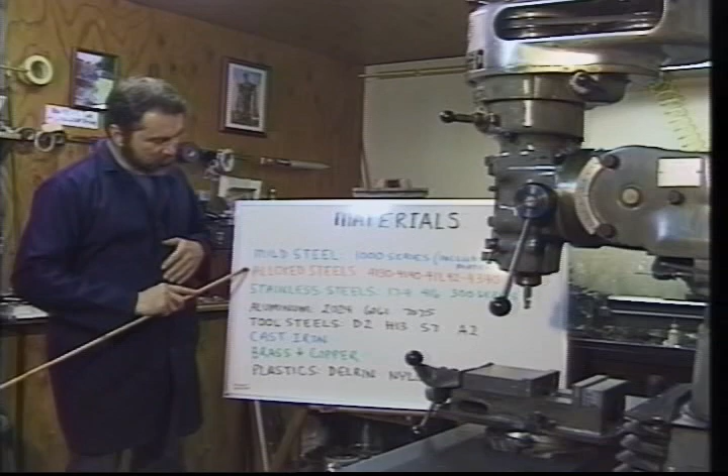Mild steels, alloyed steels, stainless steels, aluminums, tool steels, cast irons, brass and copper, plastics such as Delrin and nylon. In the mild steel category for building parts, washers, bushings, different things of this nature, the 1000 series of material works really well. There's also some good leaded materials like 11L17 that machine really well.

You get excellent cutter life, you've got high feed rates, you can really process a lot of parts in these materials. It's a non-critical material, it's not something that we would be heat treating. It's just spacer blocks, tooling fixtures, things of that nature can be made out of mild steels.

Next, let's take a look at alloyed steels. These are usually our higher chromium-based steels, such as 4130, 4140, 41L42. The L designates some lead in the material, so it machines a lot better, and 4340. These are probably some of the most popular types of alloyed steels that you're going to be working with in the machine trades. They machine reasonably well.

They heat treat up to 45, 48 Rockwell, depending upon the one that you choose, and are very popular for race car parts, parts that have a high stress application where we need a good high tensile strength and surface hardness. Many of you may be wondering, well, what type of cutters do I need to be using when machining these types of materials? For all of our mild steels, high-speed, cobalt, and carbide will work just fine.

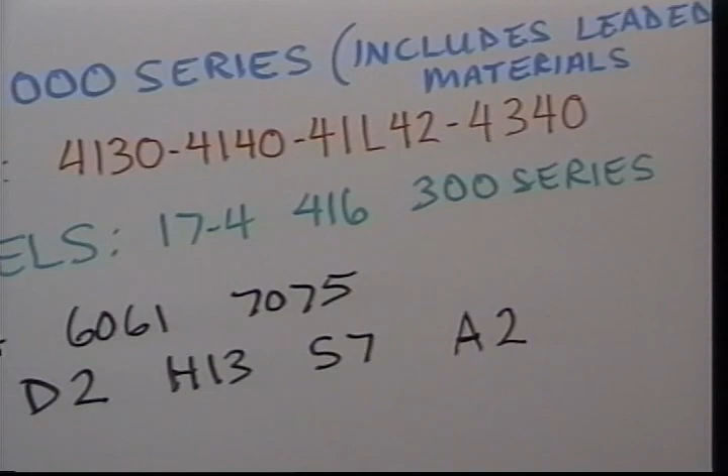When we start machining stainless steels, 17-4, 416, and the 300 series stainlesses are by far the most popular. 17-4 is probably the best in terms of corrosion resistance. A lot of people whine and complain about machining 17-4. My experience has been if you use proper fluids and good sharp cutting tools that it machines just fine, especially in the annealed or normalized condition.

416 is usually a free machining type stainless. It's used a lot in the barrel industry. It has a reasonable amount of sulfur in it, so it does machine well. The 300 series of stainlesses, 303, 308, are also good materials. They will work harden. You want to watch on the 300 series. Keep the cutter moving across them. Use a good cutting fluid in that process.

Anytime that we use a 17-4, which is a precipitation hardening stainless steel, anytime its Rockwell exceeds 40, again, carbide is probably the best choice. You can do it with cobalt, but you're going to get some squeaking noises. You're going to need to apply a lot of fluids anytime the Rockwell gets around 40 in that specific material.

Next, let's take a look at aluminum. The majority of our tooling fixtures are going to be built out of aluminum. 2024 is an excellent tooling plate material. You'll have a hardness designation of T351 on it. Anytime in aluminum, we're going to be dealing with 4 specific numbers. That is the alloy of aluminum that we are using. The last number, T351, T6, T751, those are the hardnesses of those specific alloys.

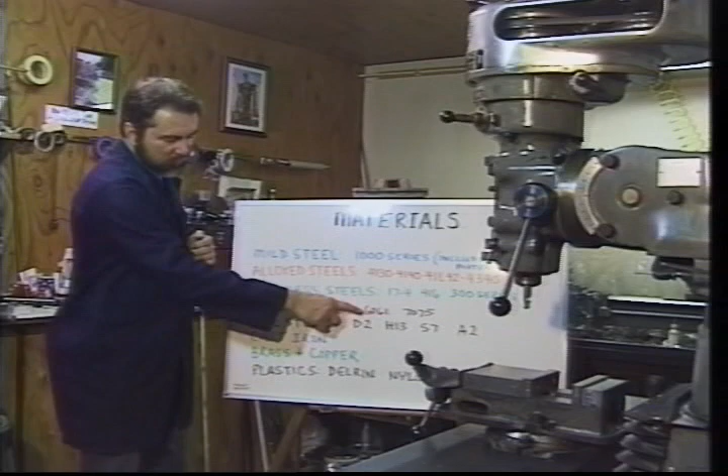6061 is an excellent material. It has a tendency to be a little gummy by comparison. I really prefer 7075 in a T6 hardness. It machines really well. It anodizes very well. That is my preferred material if I'm building tooling, jigs, and fixtures.

Let's take a look at tool steels. If you're lucky enough to get a job in the mold making industry, you're going to be dealing with a lot of tool steels. D2, H13, S7, and A2. D2 is probably one of the toughest type materials that you're going to machine. You're going to use carbide or cobalt cutters in most applications there. It's a very abrasion resistant material.

S7 has good machining characteristics, very tough, durable material. If you're going to be building a part that's under a tremendous amount of stress or taking impacts, S7 is an excellent choice.

Cast iron, we talked about that in our lathe series for those of you that watch that. Cast iron, we want to be really careful when we're clamping it on the table, not to put it under any stress where it's going to crack. We do not use any cutting fluids at all in cast iron. Carbide makes an excellent cutter choice when we're machining cast iron.

Brass and copper, those are a couple you need to watch out for. They machine well. Copper, on the other hand, though, is a very sticky, grabby substance to machine, and you do not want to get too aggressive in the feed rate when we're machining copper. It has a tendency to want to suck the cutter into itself, especially under climb cutting conditions. So take your time, be careful with the copper.

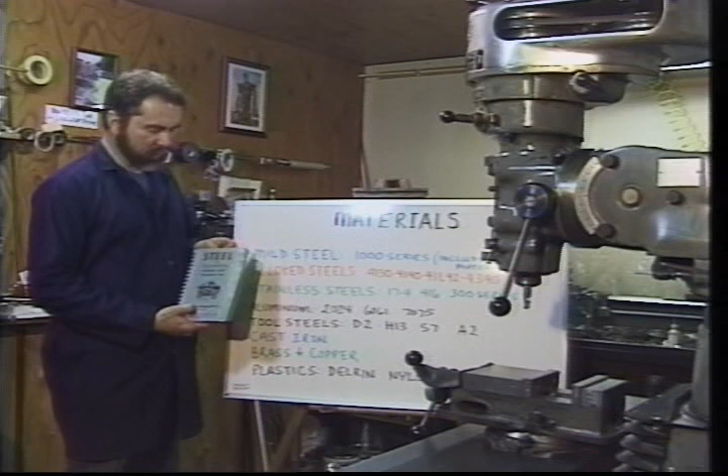Remember, we talked about 2024 aluminum. It's going to give us the color markings on the rod and bar. The ends are usually painted red. This is one of the best known of the high-strength aluminum alloys. With its high strength and excellent fatigue resistance, it is used to advantage in structures and parts where a good strength-to-weight ratio is desired.

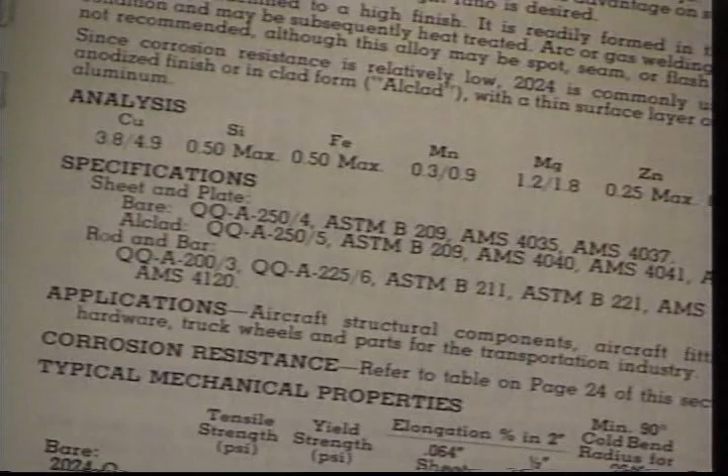That's just part of the information that's available on 2024. Let's look at some additional information. We have specific applications, primarily used in the aircraft industry for structural components, tooling, truck wheels, etc. It also will tell us the machinability of this specific alloy in its different heat treatments. It'll also show the heat treatment of the material. Remember the T designations after the 4 numbers of the alloy, T3, 4, 361, etc.

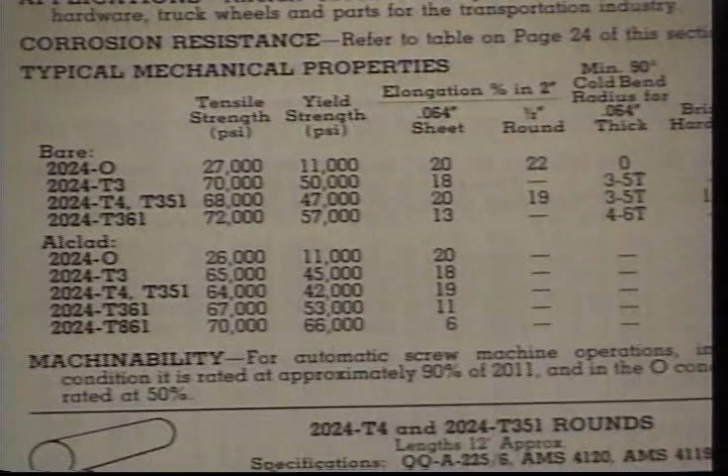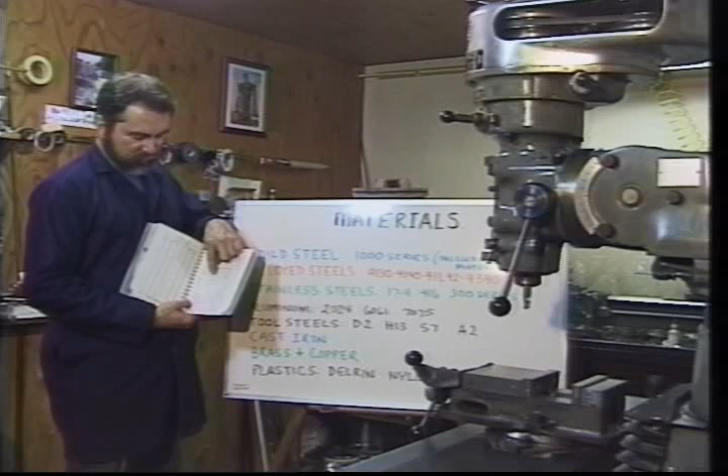Look at the tremendous difference from the standard mill run or annealed condition with a tensile strength of 27,000 psi and a yield strength of 11. Now in a heat-treated condition of, let's say, T361, that same tensile strength goes to 72,000 psi and the yield to 57,000. So approximately 3 to 5 times the strength when we heat treat that alloy. You can see how valuable of a reference source these types of books can be.

Now let's take a look in the Machinery's Handbook at a different type of alloy. Like the Jorgensen catalog, the Machinery's Handbook is an excellent source for information. One of the things I like best, we can look under specific steels and applications, and they make a recommendation as to the type of steel. Let's take a look at forgings that are heat treated. 6150 is the suggested material.

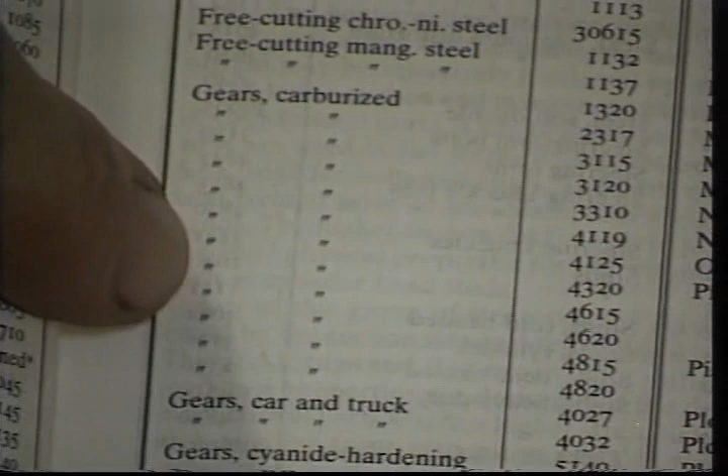If we're going to be doing gears that are carburized, 3120, 4125, 4320 are, again, excellent choices. Moving down to the bottom of the page, we can see gears, gear rings, gear transmissions, an excellent reference source if you have a specific application that we're trying to match. Simply consult the machinery handbook, look up the designated material, get on the hot phone, call up the local steel supply, and order a truckload for your next machining job.

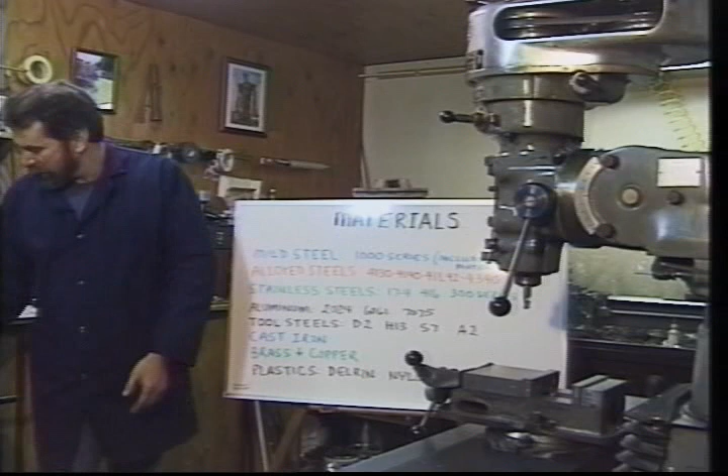There is a wealth of information in the machinery handbook. Take the time to read it and become familiar with it. It will answer a tremendous amount of questions that you may have on alloys, machining operations, etc. Keep in mind that different types of alloys are going to be color-coded on the end of the bar. Consult your local vendor from whom you are purchasing, and he'll be glad to give you the color code reference charts.

Another thing I like to do is go to the local steel suppliers in the area. Usually they're going to have a remnant pile that's filled with cut-off ends anywhere from 6 inches to 2 foot long. You can also buy aluminum plate and steel from these same vendors. It's a good idea to pick up a truckload of this next time you're in town because it's an invaluable source and it saves and makes you a lot of money in the long run.

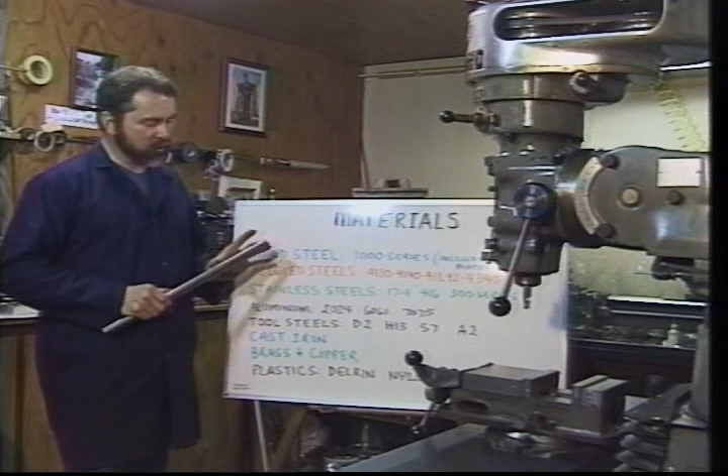If a customer comes in and he needs you to machine a part 6-8 inches long, you're going to have to call up and buy a 20-foot bar from the local vendor. Again, this is money out of our pocket. If we want to use materials for a piece of tooling plate or a little jig and fixture, having our little bone pile in the corner can be an invaluable resource. Keep those things in mind the next time you're at your tool steel supply house.

I don't know about you, but I'm getting a little antsy to start making some chips. We've covered a lot of the basics, different machine operations, the types of materials used. Now let's show you the proper way to prepare that piece of stock for a project.

We've got a piece of tooling plate that we cut 1.25 inches thick by 2 3/4 by a little over 4 inches. You can see when we cut it off in the saw, we've got a rather large burr here. And this is part of the stock prepping procedure. We simply wouldn't cut it off, set this material in the vise, and go to work on it. We're going to take a file, 6/8 inch single cut file, works really well, and we'll go around all of the edges of that material.

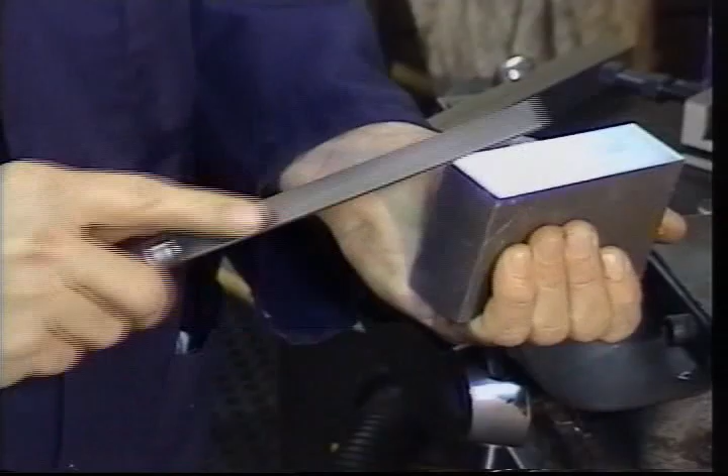Remember to push the file at approximately 45 degrees to the part. The file cuts on the forward stroke. We're going to go through and basically deburr this entire block, so when we set it in the mill vise, we don't have any burrs, nicks, or dinks affecting the parallelism of the part. You can see we've got a big dink here, so we're going to use that as our first cut to machine that away on the top.

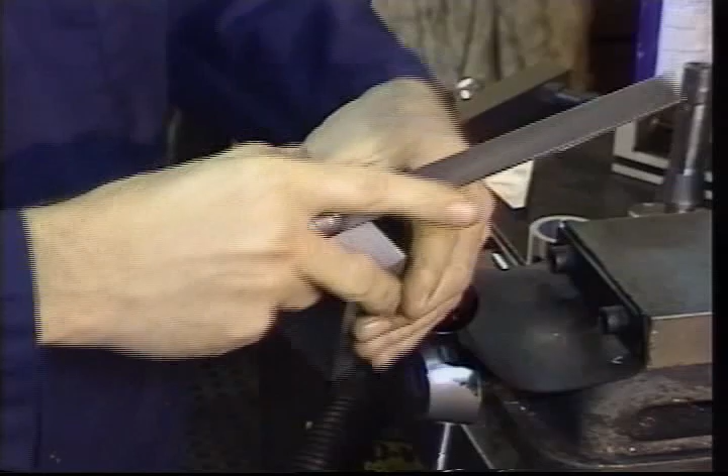Take your time during the stock prep. It's very important when we get ready to square and true up the block that we've done this. Each time that we make a cut on the part, we want to check it for a burr. We don't want to be switching back and forth and forget that we've got a big burr on one side that will later affect the accuracy or trueness of the part that we have.

Take your little paper towel, wipe the filings off of the block, and then I get in the habit of just running my hand over the block from time to time, making sure that I haven't missed anything, okay? We can take our file and run it over that surface, make sure it's flat. Usually the milled slabs that you see from the manufacturer are going to be pretty true, so we can use those as a baseline. Run our file over them, nice and smooth, remove any filings that we have left on the part.

All right, so we've prepped this piece of stock. We're now ready to set it in the mill vise and make our first cuts in order to get it truly square and parallel. We want to wipe our vise jaw nice and clean. Again, we don't want to be setting it on any parts or chips that will cause it to not work off of the vise jaw.

The rear jaw I like to refer to as the master jaw. We've dial indicated in, if you remember earlier when we mounted the vise, these particular vises are ground true and parallel within a couple of ten-thousandths of an inch. So they're very, very precise. We're going to set this block against the face of our vise. Now, if the block is not parallel or tapered, when we clamp it, it can be shifting in the vise one way or another, and you go, wow, that's a real problem. How do we overcome that?

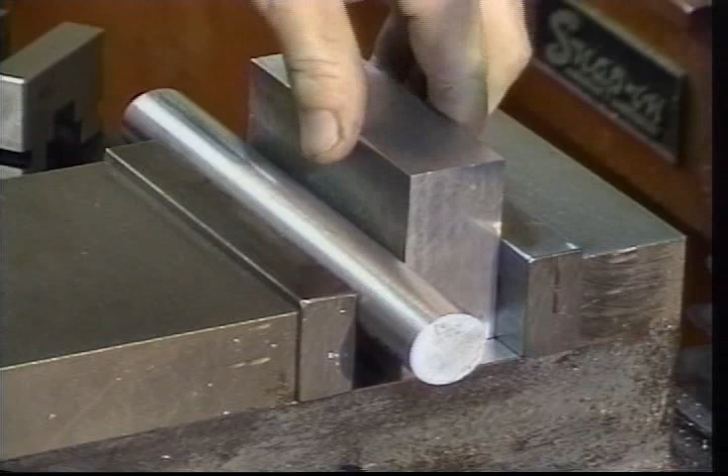A neat little trick that's often overlooked by many folks these days is simply take a piece of round stock, put it in behind our block, where we're just pushing on the center of the vise jaw, and tighten it down, okay? We've ensured that this face is clamped securely against the face of the vise, and now we're going to go ahead and take a pass across the top of the block.

We can do that with an end mill. We can do it with a fly cutter. Let's start with an end mill, and I'll show you a little trick to significantly reduce the amount of burr that we get on the part by cutting this in a climb cutting method across the top. You've watched a couple of times.

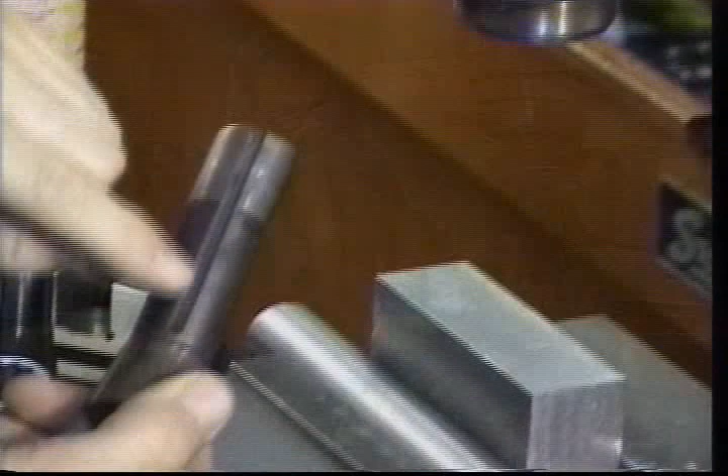We'll go over the final details of securing the collet in the chuck. You're going to have a little nubbin in the chuck that tracks off of the R8 collet. It's a little guide that's in the spindle that matches this slot to keep our R8 collet from spinning in the spindle as we tighten it up. So we'll simply insert it, rotate it around until it lines up, push it in place.

We're going to reach to the top of the mill head, and we're going to finger tighten the drawbar to suck the collet into place. Once we feel the draw nut come up tight, we're going to insert our end mill, choke it up nice and tight, reach up with our wrench, and we've noticed the brake on the top of the mill. Okay, we're going to put the brake on as we tighten the drawbar. Get it pretty snug. We don't want to twist it off. We don't want to damage the collet.

We're going to bring our cutter down in contact with the work. Remember to keep the quill handle in the proper relationship. We don't want to be pushing forward with the quill handle. All right, and I like to start on one end of the part, so we're going to move the table in what axis? All right, the x-axis. We'll center up our cutter, bring it down until we just come in contact with it. We're going to lock our quill. We can go ahead and set our stop.

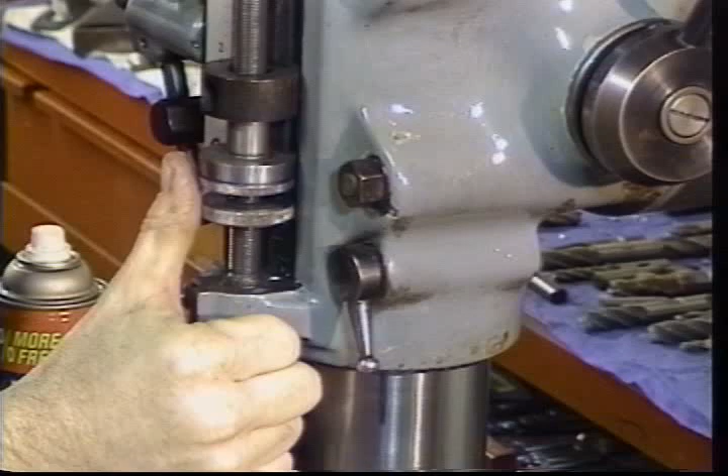Quill stop, run it up. You can see how I'm using my thumb. I've got about 1/4 of an inch spacing between the stop dial and the actual lock nut. And as I run my thumb across them, we're turning them up at both about the same level. So we're not playing chase. One locks into the other. Okay, we're ready to go. On this particular cutter, we're going to turn it at 1115 RPM.

We'll advance it and just scuff the top of the workpiece. We know we're in contact with that. We're going to raise the bed of the mill 20 thousandths. We're going to take a 20 thousandths cut the first time. Rather than go down the center of the part, we're going to index over to the left, and we're going to cut around the periphery of the part, removing the burr from the outside edge. So we'll index our cutter over, give ourselves a shot of WD-40 across the top, and advance the cutter where we're just cleaning up the top edge, cutting into the top of the part, forcing the burr off of the part.

In a production process, if we're doing a lot of these blocks, this will save us a tremendous amount of time in cleanup and burring. Okay, you can see that our block was out of parallel a little bit. We didn't clean up on that side. So let's go around to the other end. Okay. You're getting a little bit of an optical illusion with the cutter on camera. Don't worry about it. Just watch the direction of travel of the cutter. We'll go back and let's take another 20 thousandths off.

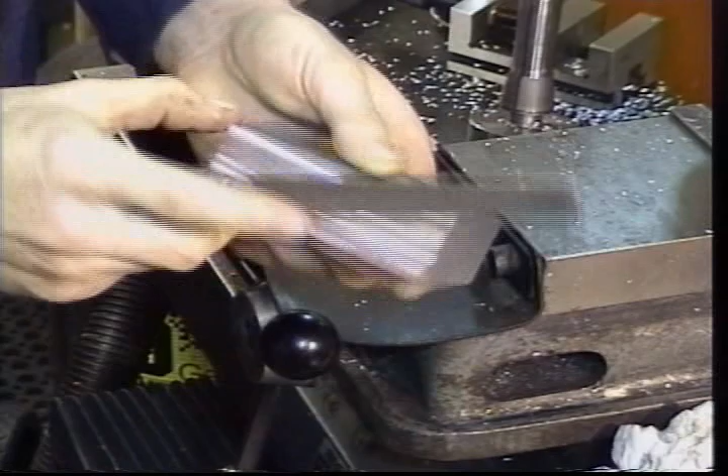So with this part surfaced on this side, simply remove our bar, take the part out of our vise, and as a matter of habit, we're going to go ahead and take our file and, just for practice, put a little chamfer on that outside sharp edge.

Okay, usually 3 or 4 passes of the file. We'll try and give you a close-up view of that so you can see the width. You can see we're just breaking that razor sharp edge with the file. Make sure and wipe the part off again because we've got little chips and stuff from our milling operation. Be sure and clean the vise out.

If you don't have stock in a paper towel company, I strongly suggest you do it, that or the rag company, because you're going to be using a lot of rags, keeping the vise clean, keeping all of the chips out. Once I've done that, I like to take my thumb and just run it across the vise jaws, making sure that there's no residual chips left.

All right, we're going to take our machined surface that we just machined. That's going to go into the bottom of the vise. This was the face or surface that we had against our master jaw. So we're going to want to repeat that as we insert our part back into the vise. Push it up against the master jaw. Grab our piece of round stock. Hold it down. Okay, and tighten our vise up.

We don't want to scrounge down on the vise. The vise exerts tremendous holding force. Simply snug it up pretty good. And we're going to go ahead and resurface this top edge. What is that going to do for us? You guessed it. It's going to make those two surfaces parallel and to dimension. So we'll go ahead and take another pass across that. Then we're ready to square the ends of the block.

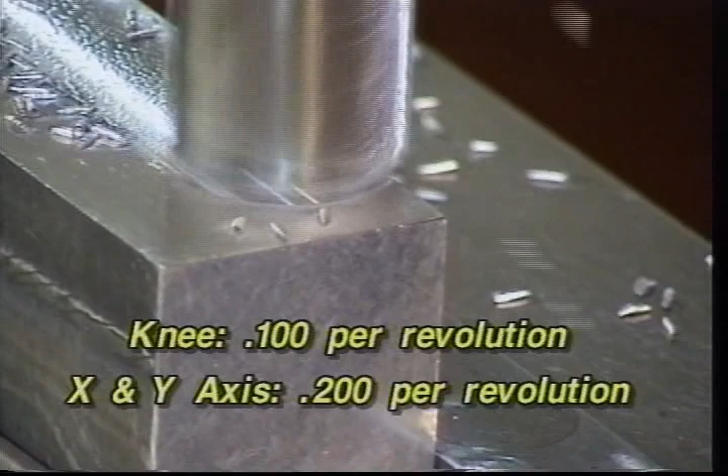Remember, on the knee, our dial is in 100 thousandths per revolution. On the cross feed, on the X and Y axes, our dials are in 200 thousandths per revolution. Index our cutter over, down the top of the part. It's a very light machining operation. Again, we're taking only 20 thousandths off and surfacing the block and bringing it into a desired dimension.

Take our towel and again wipe our part off, getting a lot of the chips and stuff out of the way. Okay, we have our back reference pushed against our master block. We've created this surface and the bottom surface parallel and to dimension. Now we're ready to square the ends of the block.

If we're to run our dial calipers, check that into the block. We've got 2 inches, 620 thousandths on this side. 2 inches, 620 thousandths on the other side, okay? Always get in the habit, again, of checking our part. If we were to get a chip inadvertently in the vise underneath the part, it would cock it, and those two ends would not be parallel.

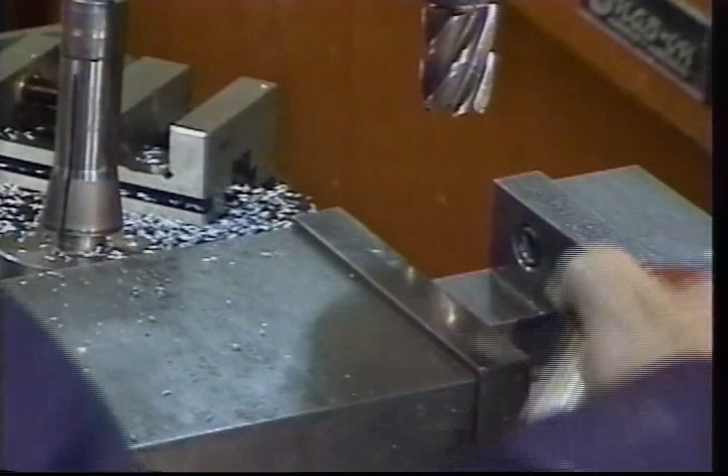Okay, with our vise jaw clean, it's now time to insert a couple of precision ground parallels, and I'm going to show you another trick that I've learned over the years, and that is to keep the parallels in place. Simply give your vise a little shot of WD-40 or any other type of spray oil, and this allows the parallels to, in essence, stick to the jaw at that point, okay? They kind of bond themselves there with that oil. We can tug on them a little bit, and we can't break that bond.

Make sure that your parallels are nice and clean and they're free from any nicks or dinks in them that may affect the accuracy or parallelism of the part that we are setting on top of them. I like running them back and forth once I mount them, and this allows you to feel any clinkers that may be underneath the parallel. Okay, so just get into that habit again. It's stuck to the vise jaw with the WD-40.

Go ahead and open our jaws a little bit. You can see now that we have a depth of approximately a ½ inch here. The depths of these jaws are 1.5 inches. So we've got a ½ inch of our master jaw to set it against. We're going to go ahead and set our block in.

In this fashion, we can retract our parallels a little bit because we're going to go ahead and square this surface now. We dialed in the back surface of our master jaw, so when we work off of the y-axis, what is going to occur? This surface and this surface are going to be exactly 90 degrees or perpendicular to one another. This is how a mill works. A mill makes things square and perpendicular to one another, just like the lathe turns things in a round, cylindrical fashion, faces them off square, etc.

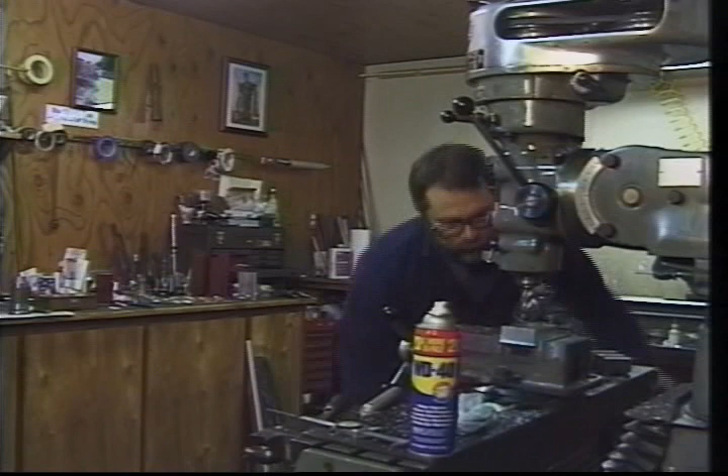Okay, we'll take our cutter. We're going to raise the bed up a little bit so we don't have to extend the quill down nearly as far. Move the table in the x-axis to get the cutter over on the side. Okay, we can go ahead and lower the quill at this point. Run the cutter up on the side. Make sure that the cutter protrudes below the thickness of the part.

We've got a little bit of a radius ground on the edge of the cutter, so again, you want to make sure that that radius extends below the part so we get a real nice flat surface. We don't want a little bit of a radius being machined on the bottom of our part, which will overall affect the squareness of things. Once this is in position, go ahead and lock down the quill, and we'll turn the cutter by hand now.

If we're cutting, you can see the cutter rotating this way. If we're to move the cutter this direction, that is in a climb cutting mode. And anytime we take climb cuts, we want to have a very small amount of chip load in the cutter at that time, because as we advance the workpiece into the cutter, it's trying to walk its way along or climb its way along the top of the part that we're machining, and this can be rough on the machine. If we're to take a real heavy cut and try climb cutting across that with a real fast feed, we can literally shear off or break that cutter as it becomes really aggressive trying to grab more material.

If we were to turn this direction and pull the cutter this way, this is called conventional milling. We're scooping the work out. The work is resisting the thrust of the cutter as it's being fed manually by the table across the part. We can go both directions to remove a maximum amount of stock, but the heaviest amount of removal occurs when we are in the conventional cutting mode. Okay, watch, we'll show you both methods.

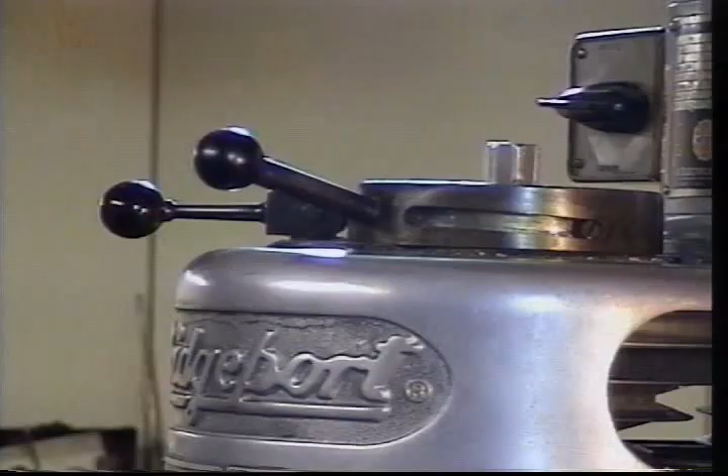We've showed you how to install the cutter. Now, here's a couple of tips and tricks on how to remove the cutter and replace it with a fly cutter. We're going to reach to the top of the mill and apply the foot or hand brake. Put our wrench on top of the drawbar. With the brake on, we're going to go ahead and break the cutter loose. Once we see the wrench is starting to turn freely, we can loosen our grip on the hand brake. We're going to reach down and with our index finger and thumb, grab the cutter as we continue to loosen the drawbar.

Once the drawbar is loose, I like to take the wrench, or you can take a plastic hammer and simply tap the top of the drawbar, and that breaks loose the collet from the cutter, separating the two for removal. Take your right hand, take your middle finger, put it on the collet with the left hand at the top, and we're simply going to spin the drawbar off, releasing the collet from the spindle.

Okay, very important. Don't drop the collets. Don't drop the cutters on the workpiece. If you're dealing with a carbide cutter and you drop it out of the collet on the workpiece, there went a $40, $50, $60 cutter because it's going to chip and break. Make sure that we've removed all chips from the R8 collet when we get ready to install the other one.

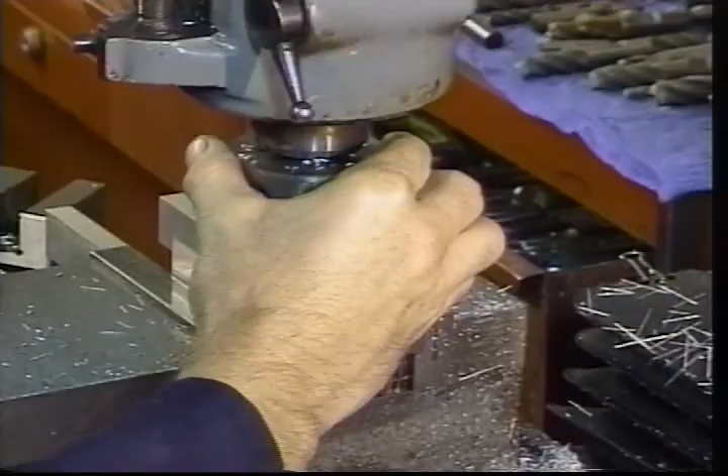Insert it, rotate it until we find the guide, reach up, engage the collet with the drawbar by turning in a clockwise fashion, and we're now ready to install our fly cutter. Choke the fly cutter up nice and tight. We want to have good rigidity in any cutting operation that we engage in. You can see we've got about 3.5 inches of depth between the fly cutter and our surface part.

We can go ahead and raise the knee, again keeping a very rigid setup while we're machining this. You can also bring the quill down if you want. I like maybe bringing the quill down an inch, inch and a half. We're going to bring the cutter down towards our workpiece with the quill and watch until the cutter just comes in contact with the top of the workpiece, okay? At that point, we're going to reach over and lock the quill down.

We're going to go back to the knee and our Z-axis, and in a counterclockwise motion, we are going to lower the table 5 thousandths. So now if we advance, the cutter is not scuffing on the top of our part, okay? We'll do this once the cutter is running and we're ready to advance it into the workpiece.

Remember, a fly cutter is not for rapid removal of a lot of material. It's simply to surface the material. A heavy cut with a fly cutter is usually 50, 60, 80 thousandths, not much more than that, depending upon the type of material that we're doing. Very fine amounts of material can be removed in order to surface the top of the block.

So we're going to go ahead and back the cutter away from our block. Okay, we've got clearance now, so when we turn it on, we're not ready to cut. We're going to go ahead and advance the cutter over the top and very gradually raise the table to the 5 thousandths that we did when we lowered it. Okay, so now we're in contact with the block.

Oftentimes we're called upon to perform a second or third machining operation on an existing part. So it's very important that we understand how to properly set that part up, make different locations based on that part's length, diameter, width, etc., so we can get a hole in the right place, machine a slot in the right place. As an example, we're going to take this round cylindrical piece of aluminum tubing. The customer has requested that we find the center of it, drill a hole in the center of the part in this dimension as well as this diameter.

Now, a problem comes to mind. Many of you will say, all right, well, we'll just set it in the vise this way and clamp it. Well, two things can arise in this particular application. One, if we tighten the vise too tight, we can simply crush this piece of tubing. But most importantly, we don't have any place to get at to really measure. We could come back off of our master jaw with our edge finder and kiss it this way and then move into the center. But I think a better way to hold this particular part is to simply turn it in the vise this way.

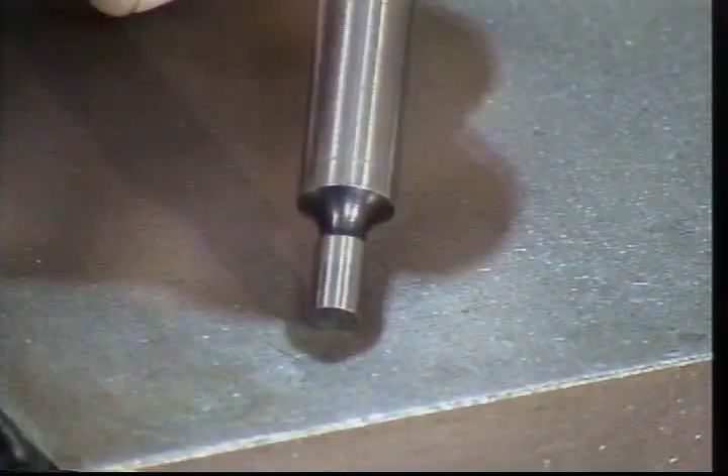All right, this allows us to measure off of an exposed area here as well as on this side. So we've got two uninterrupted areas that we can bring our edge finder against in order to locate the edge and thereby the center of the part for our drilling operation. This particular tool that I'm holding in my hand is called an edge finder. Very important tool for the machinist.

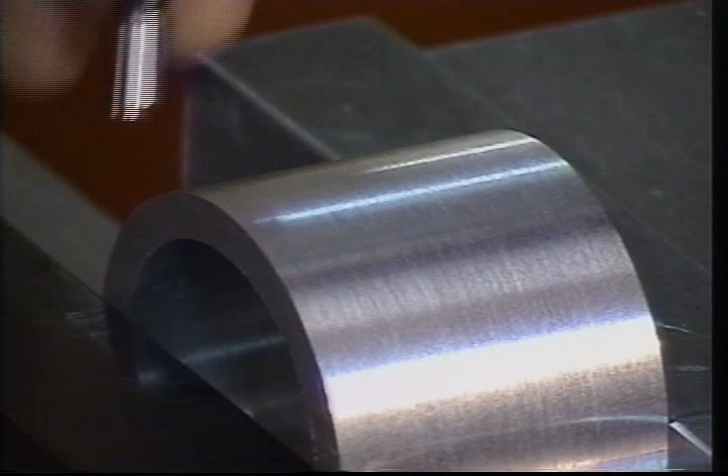These little nubbins that you see on the end are held together in the body by a long extension spring. So as we run it up against the part, it starts running true, and then the moment that we hit the part, you're going to see it jump in an offset mode this way, indicating contact. All right, the diameter of our edge finder is 200 thousandths. This is usually a standard. So anytime that you're dealing with an edge finder, run your dial calipers or micrometer over the end to determine the diameter of it. As we bring our edge finder up to the part and it makes contact, you'll see the offset kick in. Okay?

At that point, we've made contact, and we can go ahead and adjust our dial, whether we're using a digital readout or, in this instance, we're going to go ahead and use the X and Y axis and loosen the dials on the bed in order to perform this operation. So if our part were 2 inches thick, the center of it would be 1 inch plus the 100 thousandths offset that we have in the edge finder. So we would move the part over 1 inch and 100 thousandths from our contact point to locate that hole exactly in the center. It'll become a lot easier for you to understand once we show you the actual process.

We're going to grasp this in the Albrecht keyless chuck. The body diameter is also 3/8 of an inch in diameter, so we can grab it in a collet. But a drill chuck is the obvious holding method because we're going to follow it up with the center drill.

Let's take the dimensions on our part and start to calculate where our center line is going to be. Using the dial calipers, we've got a dimension of 1 inch, 250 thousandths. So half of that is 625 thousandths plus the 100 thousandths for half the diameter of the edge finder. So from either edge, the amount that we would move the table in the y-axis is 725 thousandths. We'll work one dimension at a time. Watch closely as we show you the offset when using an edge finder.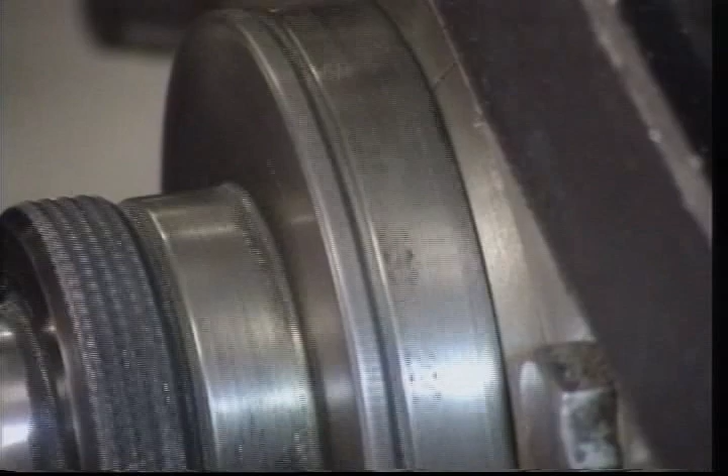We'll slowly go back to our dial now, and we're going to advance the table 725 thousandths. Remember, in the X and Y axis, each rotation of the dial is 200 thousandths per revolution. So we've got 200 thousandths, 400 thousandths. Watch our knob. This is a good counter that we can do each time we rotate it. 600 thousandths, 700, 5, 10, 15, 20, and 25, stopping on 75. Now it's time to lock the gib down on the y-axis of the machine. We'll turn our machine off.

We'll take another dimension as to the diameter of the part. 1 inch, 740 thousandths. We're going to divide that by 2, so that is 870 thousandths plus the 100 thousandths for the edge finder. We're going to advance our table on the x-axis, bring our edge finder down to where it just goes past the center line of the part. Remember, we always have to work off of a diameter or an edge of a part with the edge finder. Now it's real critical that we don't get the body of the edge finder up against the part, because this is going to give us a false reading. We simply want our 200 thousandths diameter lug to be the indicator. So be very careful in the placement of that.

Lock our quill down, turn our machine on, and again, watch for the offset as we come in contact. All right, we can see the offset appear right on the edge here where my fingernail is. We're running flush, there we see the offset. At that point, as soon as we see the offset, we know that we've made contact. We're going to reach under the table, lock our gib down, locking the table into the x-axis. We're going to loosen the lock ring, rotate our dial to 0, lock the lock ring down again, loosen our gib.

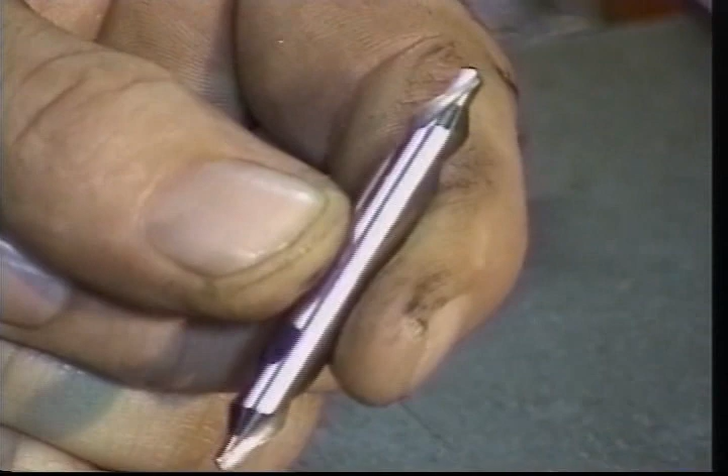Remove our edge finder, install our center drill, and let's take a minute and talk about center drills in the milling operation. We have different sizes of center drills. This is a double-ended center drill, as most center drills are. Anytime that we're using a keyless chuck, keep in mind that we have a plate that comes down and secures the point on top of the center drill.

So when we install the center drill in the chuck, we want to bring the chuck in contact with it, push it all the way to the top, and then pull it down maybe 30, 40 thousandths, so that plate that's coming down on top of the chuck does not dull the top cutting edge of our center drill. That's a mistake a lot of people make. They push the center drill in, they push it all the way to the top of the chuck, and then they really put the pretzel hold on it, tightening it, and that's what happens. That plate's forced down against the top cutting edge and it dulls it, and we've lost a cutting edge on that surface.

So with our center drill now, you're going to see we have the little spot tip here, and we've also got a 60-degree angle here. This is what's going to guide our secondary drill after we've spotted it. The center drill is a very short, stiff drill. It's used for locating that first hole. It doesn't walk and drift as if we were to use a long conventional drill. So watch closely now as we perform a center drilling operation in the mill.

Turn our machine on. Going to bring our drill down in contact with our part and very gently pull the quill down. Now we're just starting to cut into our 60-degree chamfer. We'll go ahead and retract our drill. Okay, you can see now that we've got a nice cone-shaped hole that's going to guide that second drill as we come in and bring our hole to size. This is very important that we come down into that bevel, not just come in and spot it on the top.

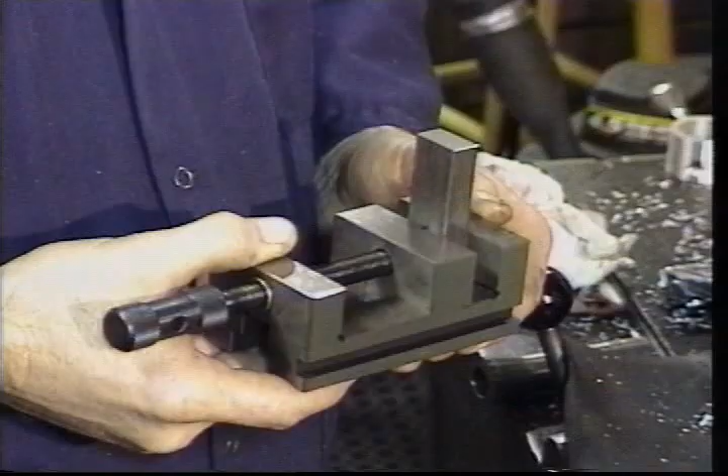All right, so that's one method of finding the center of a part, drilling a hole, using an edge finder. Now, let's take a look at another type of setup and the complications that it may afford in a machining operation. Let's take a look at the use of a secondary vise clamped in our primary vise. This is our little toolmaker's vise that we talked about earlier. We've got a piece of 11L17 bar stock mounted in it, and the customer's requested that we cut a 30-degree sloping angle on the end of these parts. Apparently it's some kind of a key slide that he is using in the manufacture of another part, and he needs a precise angle machined on that.

So by grasping the part in the vise, we're simply going to set it in our other vise and use what is called an angle block. This is a precision ground block at 30 degrees. We're simply going to set it in underneath the vise jaws here and set our vise on top of it. Make sure that it sets nice and flat underneath here. It's just a little gauge spacer block is all we're setting it on to dictate the angle of our vise.

Okay? Just seat our vise with the heel of our hand, go back and loosen it up, check it, make sure everything's fine, give it the final tightening operation. Now we're going to be machining a piece of steel now. Up till now we've been machining aluminum.

So we're going to want to adjust the speed and feed rate because we're dealing with a little bit harder material. We also have a lot of material exposed out of the vise, so that's something that we need to keep in mind as well. We want to take some relatively light cuts as we surface across the top of our part. We're going to raise our table up, giving us a good rigid cutter position.

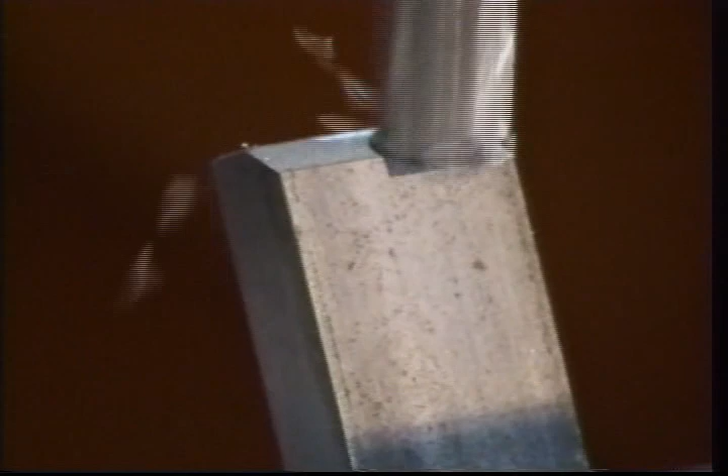Again, listen to the machine. We've got a nice smooth sound as the cutter is working across the part. It's not going clackety clackety clack, indicating that we're machining at too high of an RPM or too fast of a feed rate. Okay, when you have a lot of material exposed, as in this case, you want to have a very slow feed rate. We don't want to hog across it really quick, tearing the part from the vise.

Okay, we're just about there, and remember, this is kind of a climb operation relative to the top edge of the part. We're removing the burr off in this process. Index our cutter over. Come across it for the second pass. Okay, about another 20 thousandths ought to do it.

You can also watch the chip color. You can see the chips are coming off in a nice shiny color. They're not turning straw or blue color, again, indicating too high of an RPM or too fast of a feed rate. We're not using any cutting fluid on this particular job. We're machining a leaded type material that machines really well.

Okay, there you have it. We've surfaced that at 30 degrees. Done a real nice job. We've showed you a little different type of material now. That was a piece of steel, 11L17. Nice piece of free machining leaded steel. Got to turn it on the side there, and you can see the angle that we've machined on it. So you can see the versatility of having a couple of vises around and how to mount them in our main vise on the table.

The customer really gets ticked off if he's got some really nice ground parts and he sends them to you for a second or third operation to be done, and you muck them up by clamping a bunch of drill shavings into the sides of his part, okay? So take your time. Again, we want to have pride in our work. We want to make sure that everything we do is the best that we can possibly do. We don't take any shortcuts. We don't turn out any shoddy work simply because we've got a hot date that night with Susie Q. Do it the following day.

All right, we've secured our part in the vise. We've tightened the vise jaws up. We've pushed down with our fingers, loosened and tightened the vise. Everything feels really solid. We'll go ahead and replace our cutter now with the edge finder, and we'll make some more calculations as if we were going to drill a hole in the top of our part.

Always get in the habit of snugging down the edge finder in the collet. Just don't finger tighten it. Okay, we want to get a real true reading now. We'll take our dial calipers. We're going to measure; we're going to cut a slot down the top of this, just as an example.

The width of our part is 1 inch, 245 thousandths. So we're going to take and divide that in two. That's going to be 622 and a half thousandths plus the 100 thousandths offset for the edge finder. So our total dimension is, for the price is right, 722 and a half thousandths in order to get our spindle directly over the center of our part.

All right? Turn the machine on. Don't forget to throw your safety glasses on. Going to bring our edge finder up very gently until we just see the offset. Okay? At that point, we're going to lock down the gib. We're going to come over to our dials again. We're going to loosen the lock ring, re-zero our dial.

Stay focused on the dial right now. I'm just going to go up and raise the edge finder, and we're going to advance the table in the y-axis now, 722 thousandths, 200, 400, 600, 700, 10, 22. And as we get up on those half thousandths, I like to stop just shy of it and just take my knuckle and tap on the hand wheel to achieve that extra half thousandths, okay?

If you've got a digital readout, you're simply going to be watching the digital readout at this point until that half thousandths clicks up. But using your knuckle as just a little knocker is another little secret in order to advance the dial carefully. Turn our machine off. If we were to project our edge finder down, we're in the exact center of that part in order to cut a slot.

All right, we've got a more difficult job to tackle now. We've got a headspace gauge. For those of you that are familiar in the firearms industry, this is a headspace gauge for my new handheld personal defense weapon. Only joking. We need to bore this hole out a little bit larger in the center of this part, but wow, how do we find the center of it?

We want to make sure that we've located it securely in the vise. We can put an additional V-block clamp or make a V-block clamp in here that holds it securely, but just to show you how to dial it in, we're simply going to constrain it in the vise here snugly. We'll show you how to find it in a hurry. We've inserted a 3/8 collet in the top. We want to find the center of that hole quickly, so we're going to turn an end mill upside down, lower the quill in preparation for the final dialing.

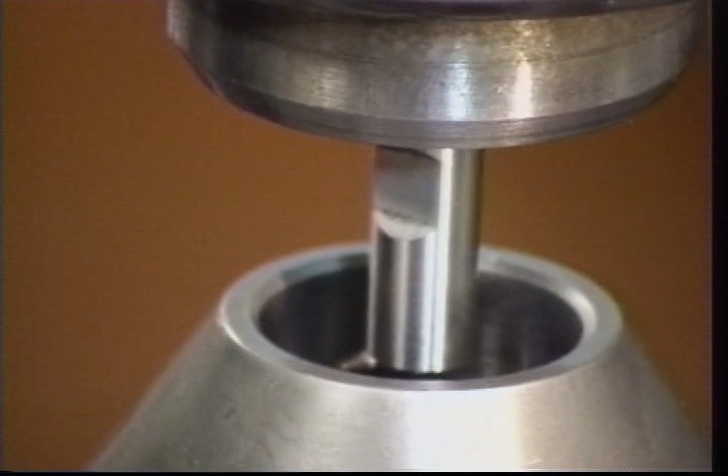Okay, so we're going to advance our table, the X and Y axis, and we're just going to eyeball that end mill into the center of our part. Okay, looking left and right, down on the top, and let's see where we're at. Okay, that looks pretty close. Remember how we used the backside of the end mill to help align our vise prior to the dialing in operation. This is basically the same thing. It's a neat little trick that I learned over the years to facilitate rapid mounting and machining of specific parts.

Go back to 0, and again, we're going to go the other direction now. There's 200 thousandths. Okay, and 180. So just by eyeballing it, I missed it about 10 thousandths, or double the thickness of the hair on your head. So let's go back to center now, where we think it was in the eyeball. We're pretty close, and let's install the dial indicator, and we'll bring it into exact location.

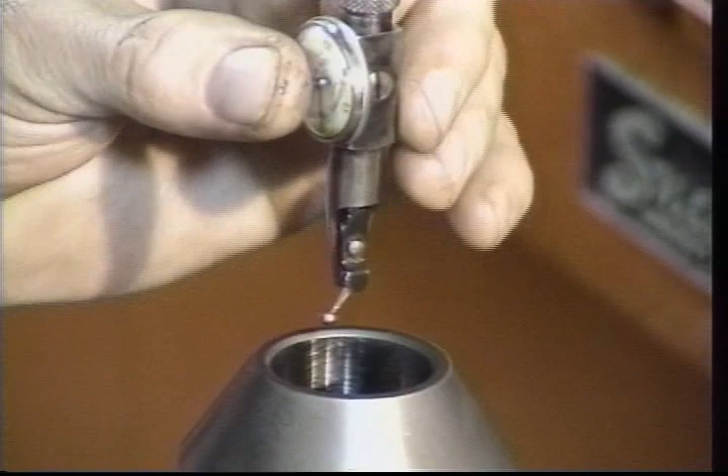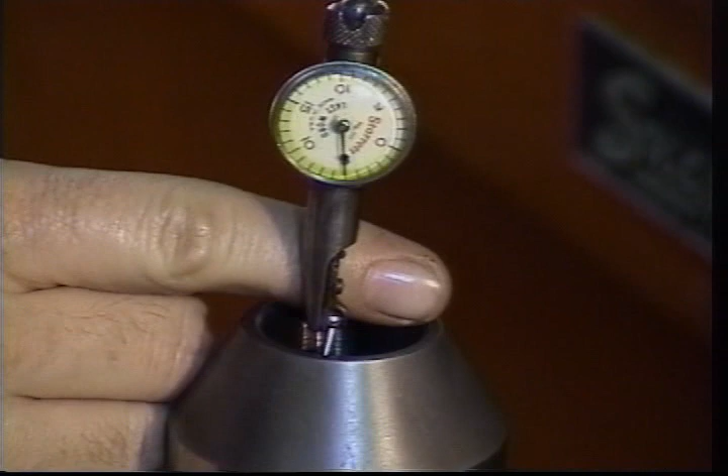Okay, and we can take the dial with our little flipper, flip directions here. So now when we come in contact, okay, with our part, we're going to lower it down into the hole. Then we're going to take our finger and just advance it over to the side. We're going to preload the dial indicator a little bit. Okay, right to around 15.

Then we're just going to rotate it by hand and watch the amount of offset. And I like to work it again as we did when we were dealing with tramming in the head on a north-south, east-west direction, or the x-axis and the y-axis. Okay, it's just a little bit easier to keep track in our head how much we want to dial in that part. So we'll take a reading here at the south end of things, and we've got 12 thousandths.

We'll turn it over to the other side and see what we have there. And we're at 13, so we're going to take a thousandths adjustment out there. We'll turn over to this side. We're at 5. And we're at 20 there. So we'll go back to 10. Okay.

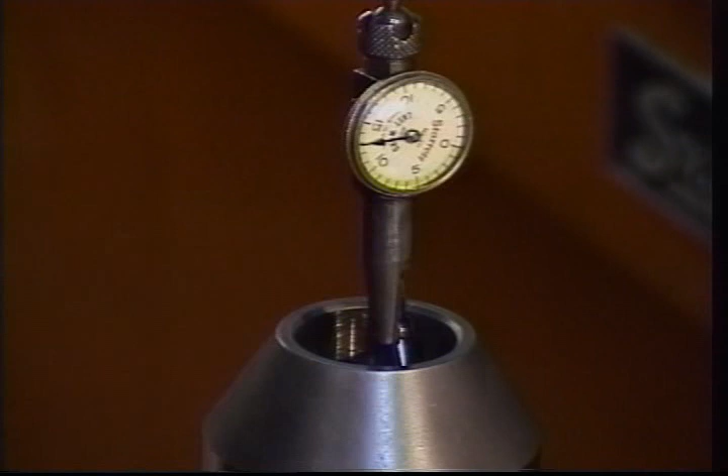Okay, and again, if you're running out of offset, go ahead and just preload the indicator again for another 15, 20 thousandths so we get plenty of contact as we rotate it around in the hole. We've got to have pressure with the dial indicator in order to get an accurate reading.

Okay, we're just looking at the dial again in the north-south, east-west direction. We're making the adjustments with the travel dials on the mill to where that needle in rotation stays in the same location or within whatever tolerance we decide is appropriate for the task at hand.

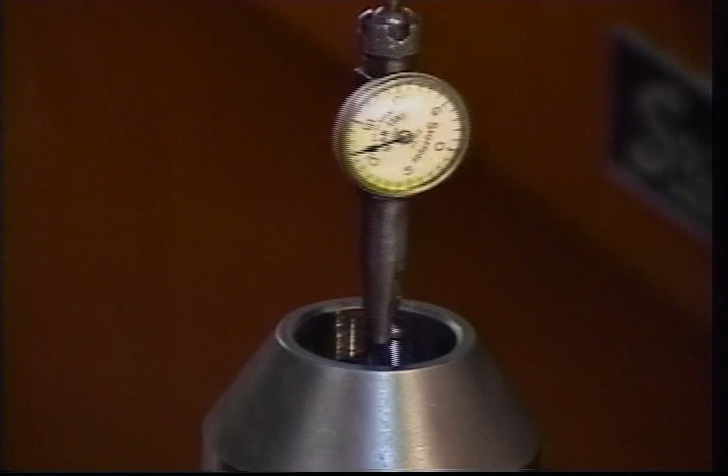Okay, we're within about a half a thousandths now on that hole. We rotate it all the way around. So now we're ready for that boring operation. Our hole that we would bore would be concentric to our existing hole within about a half a thousandths, which for this intended job is pretty doggone close.

Now we're going to step up to a little higher tech tool, and one that I strongly recommend you purchase, called a Blake coaxial indicator. You saw approximately how long it took us to dial this in. We showed you a couple of tricks by using the end mill inverted in the collet to roughly eyeball it in. Now watch how quickly it takes to bring into play with a coax indicator.

I'm going to lower the bed a little bit so we can get our coax indicator in place. Raise the quill. Remove our existing indicator and replace it with a 3/8 collet. All right, this is an example of our Blake coax indicator. Really a slick little product. I wish I had invented this.

We've got different feeler points that we can use depending upon dialing in the inside or outside of a hole. This portion you see goes into our 3/8 collet, and this is a little hold bar to hold it firmly in place while we turn the machine on and make the necessary adjustments while the machine is running. Watch how quick and slick this particular product is. Insert it into the collet. Again, tighten it down. We don't want it falling out during the dialing in process.

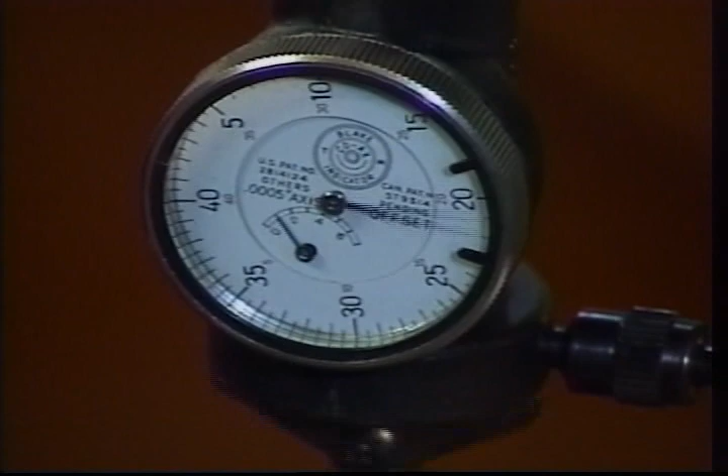All right, if we take a look, we can see that we had our original dial with the Starrett Last Word in it about a 1/2 thousandths. Now, watch how quick and easy it is with the coax indicator. We're going to move the y-axis out. We can see our needle dial is just going nuts right now. Watch how easy it is to pull it back into spec.

Simply turn it until that needle just about comes to a stop. All right, if we go too far the other direction, again, the needle starts to go nuts. So it's really fast and easy to bring it back into play. Very slowly and precisely till all needle movement stops. Now let's do it on the x-axis, and you can see what happens. Right, needle's going nuts. We'll bring it back into play.

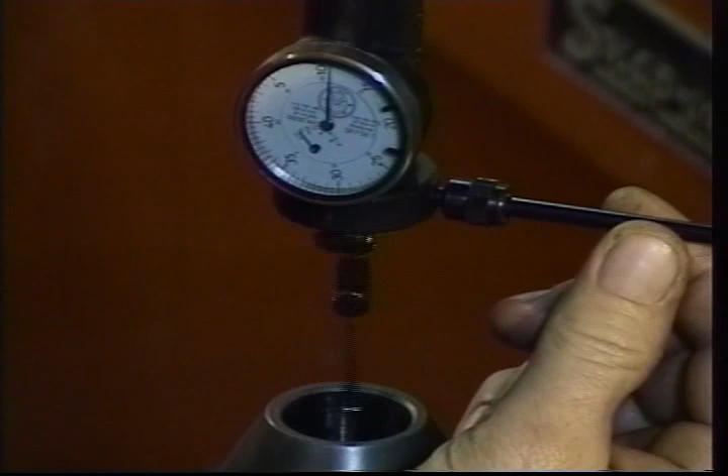Okay, and there we are within about 1/10,000th of an inch of being perfectly dialed in above the bore in this specific part. The coax indicator, in my opinion, is one of the most useful tools that you can buy if you're going to be doing a lot of dial indicating work, either on interior or exterior diameter parts.

All right, we've reviewed a lot of the techniques on how to properly set up the workpiece, how to use the edge finder, how to square a block of material. Remember to remove the burrs. Remember the trick with the WD-40 on the parallels. That sucks them up against the vice jaws, keeps the dirt and debris out from behind them, keeps them from shifting as we remove the workpiece to interchange it with another one. We showed you how the coax indicator works. We showed you some different methods that allow you to make the ideal setup.

Keep in mind rigidity is very important. Keep in mind that the amount of cutter protruding from the collet is again very important. We cannot gain in one area and lose in another. We have to work together. We have to have a good solid work support. We have to have the cutter mounted rigidly in the collet, in the tool holder, or in the chuck.

Remember, when you're using an edge finder, 9 out of 10 of them are going to be 200 thousandths in diameter. When we come up against the workpiece, we want to add an additional 100 thousandths to whatever the half dimension is in order to bring the spindle and quill directly to the center line of that existing part. All right, that's pretty well a wrap on setups. Now let's move on to our next phase.

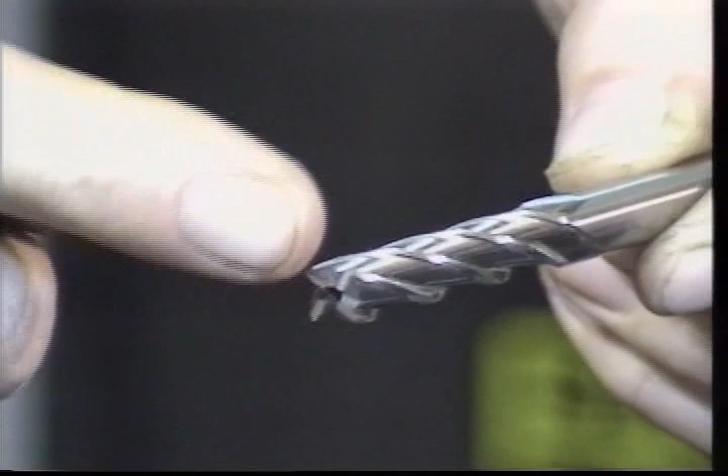This particular cutter is a 4-flute, extra long flute length. Okay, so you can see the depth here, and I'll show you as a comparison what a standard depth looks like. Okay, you can see the two. This has about a 5/8 of an inch cutting depth along the periphery of the cutter, and this has about 1.5 inches. This is really a popular cutter if you're facing across the thick part or we have to get into a deep hole and machine down on the sides.

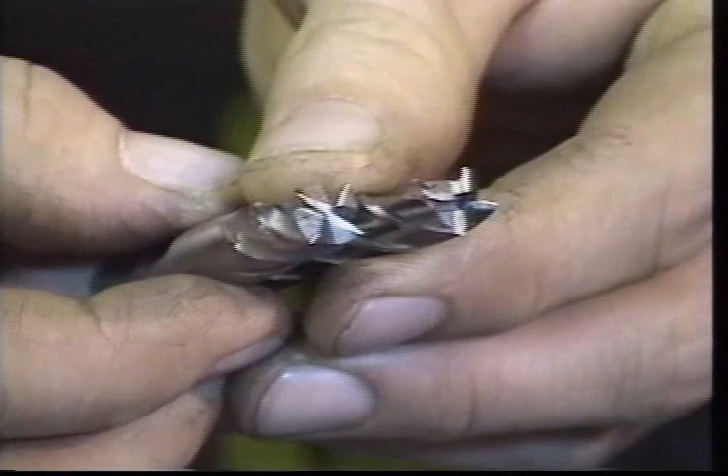Now let's look at the end of the cutters because we can see a difference there as well. This is what we call a 4-flute center cutting cutter. You can see that in the center the cutting edge runs clear through. We can plunge with this particular cutter. You'll see a lot of 2-flute cutters are a center cutting flute as well, so we can plunge with those.

On this particular end mill, this is a non-center cutting mill. You can see the little center drilled hole in the center of it that they use when they set up and grind or sharpen this particular end mill. So this one is strictly for working with the periphery of the cutter or cutting and enlarging an existing slot. We cannot plunge with this type of an end mill.

All right, this is a 1/2 inch solid carbide ball end mill. And if we were to look at the profile of this cutter, we can see that it resembles a ball or a hemisphere. Okay, this is used for decorative cuts, cutting a slot or a flute that we want to have a radiused bottom in. Very popular cutter style, very expensive cutter in solid carbide. You want to protect your cutters when you have solid carbide around, as they're quite an investment. Don't let them get chipped or dinked.

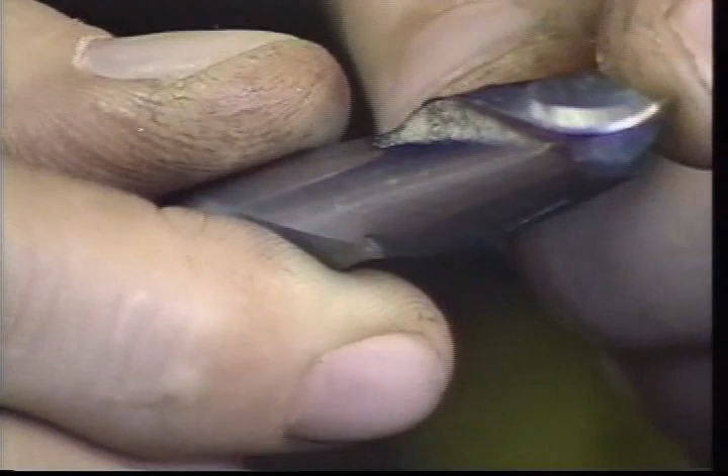This is a 2-flute cutter, and again, if we were to look at the end of it, this is a plunging type cutter as well. And by plunging, I mean from the vertical position, we can plunge down into the material while the tool is turning and cut.

This is a double-ended mill, meaning we have cutting flutes on both ends of the mill. This is a single-end mill. Okay, it'll only cut on one end. You get more bang for your buck often by buying a double-ended end mill. This is a 5/8 end mill, 4-flute. We'll look at the ends of it.

Center cutting or non-center cutting? You tell me. We've had a little lesson on that earlier. For those of you that guessed center cutting or plungeable mill, you guessed it right on both ends. Okay, 4-flute cutter gives us a lot of surface area when we're cutting. Good chip removal with this particular type of cutter.

You'll also notice on a lot of the end mills what we call a Weldon flat. This is very important depending upon the type of tool holder that we're using. We'll show you a little bit later under tool holders where this comes into play.

We've got a 3/4 inch solid carbide end mill, and you can see the gold color between the flutes here. This particular solid carbide end mill was what we call TiN coated afterwards, and it's a hardening process that goes over the outside, ensuring a little bit longer cutter life. However, when the cutter gets dull and we grind through the TiN coating, it's simply there for effect and to remind us how much this particular cutter cost when we purchased it originally.

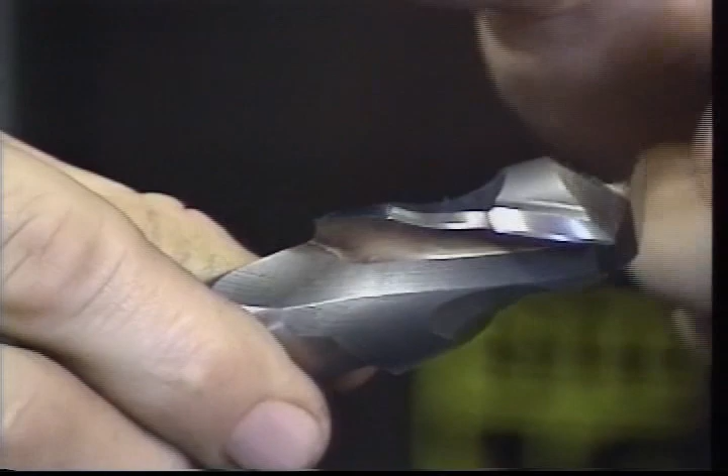This is an example of a form cutter. This was a 2-flute center cutting end mill. You can see again on the close-up that we can also plunge with this type of end mill. We've had this end mill special ground for a radius in the center, and we'll show you an example of what type of profile this cuts. You can send your different cutters off to the different grinding houses and have your own form cutters done for specific applications in the shop.

Important considerations in form cutters, as in this case, if we have a radius from the end of the end mill to the center of the radius. So when we plot this on a piece of material, we know how far to move the bed in the z-axis in order to center up on the radius and get this form tool to work properly for us.

This is another example of a form tool. It's called a corner rounding mill. This does a lot of decorative work if we're going to profile a round or square or rectangular part and produce a nice radius edge. Very useful tool. Gives us a real artistic look to the finished product.

Non-center cutting. This tool strictly is working around the periphery of the part to be able to cut a radius edge. And they come in different sizes. You'll see on the end mill this is a 1/4 inch radius. Okay, so that's the style. This particular one is a high-speed steel corner rounding end mill made by the folks at Keo.

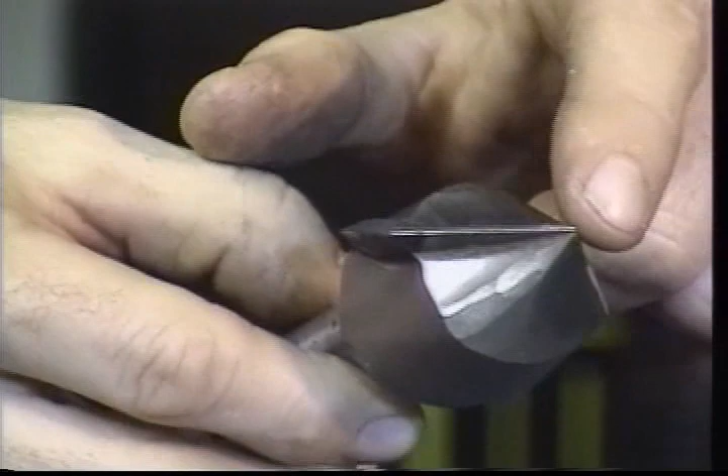It's a center cut, so if we wanted to work in the vertical mode, we can come through and plunge to a specific depth. We'll show you how to properly cut a V-block for tooling or for personal use by cutting a slot or channel first and then coming back with our form tool in order to cut that 90-degree V-block.

This is an example of a Woodruff cutter. Again, a specialty cutter. This tool is used for cutting slots or keyways. There's a variety of different sizes. The folks at Keo are probably some of the largest manufacturers of specific Woodruff style cutters.

Now you'll notice the number of teeth that we have on this style cutter. For those of you that are already up to speed, they require turning this particular cutter at a very slow RPM. So we would simply engage the milling machine in back gear any time that we were to use a Woodruff style cutter due to the number of cutting teeth or flutes, if you will. The normal cutters that we'll deal with in an end mill are usually 2, 3, and 4 flute, depending upon the type of material that we will be machining.

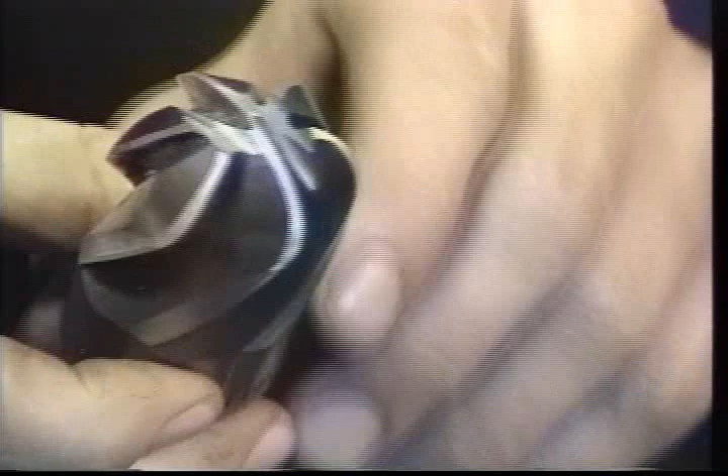Here's an example of a rather large ball end mill. Again, this was a specialty cutter that we had ground. It's a Brubaker, very good quality cutter. Center cutting. You'll see that 4 of the 6 flutes here have been relieved on the sides, so we're only going to be plunging with the 2 in the center. So this is going to produce a 1.375" radius in whatever it is that we are machining. A very expensive cutter if you had to go out and buy it.

A good tip is, if you live in an area where there's aircraft manufacturing or large machining facilities like Rohr Industries, Boeing, etc., take the time to go through their scrap pile. When their cutters get dull, chipped, or broken, you can often buy these for literally pennies on the pound and have them reground and use them in your machine shop at a tremendous savings. They're well worth your while for doing a lot of specialty and form cutters. I've done that over the years and have acquired quite a collection of very expensive cutters if I would have to go purchase them new.

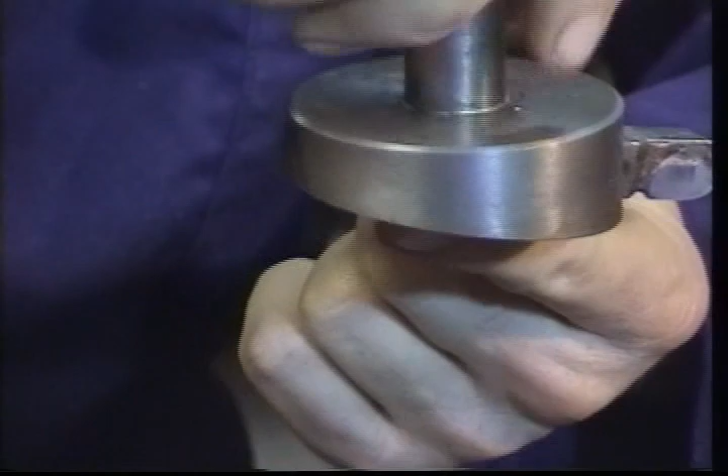This is what's called a fly cutter. A fly cutter is a very useful tool in the machine shop, especially if we're surfacing a lot of material. We've got a lathe tool bit mounted in a special holder that you can make on the lathe in the mill, and it runs in the vertical position this way, and as it turns, we're just shaving off material. It's not for removing a big bulk of material, it's simply for surfacing in one smooth pass, making a flat surface, prepping our work for secondary or third operations.

Okay? Last cutter we have to look at looks more like a horizontal mill cutter. Yet this is a special horizontal mill or stub arbor that we can purchase. It's got the R8 collet profile on it, and this goes up into our spindle quill. This is a lock nut on the bottom that we simply unscrew, and we can space or put different types of horizontal cutters in this, allowing us a little more versatility in the vertical mill by being able to cut a fluted barrel, let's say, or put different flutes in a part for aesthetic value or for cooling value. Really a handy tool to have. They're going to run you $35 or $40 out of most of the popular tooling catalogs.

All right, that's a pretty good overview of a variety of cutters that you can expect to use and find in your average machine shop. But before we get started making chips, let's move on and have a look at our next principle.

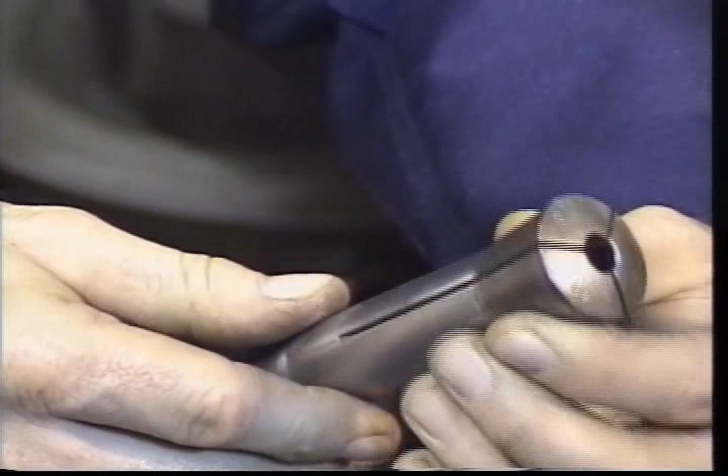In order to hold our tool rigidly in a vertical mill, some very bright guys dreamed up some ingenious methods for us. Probably the most popular is the use of our R8 collets. As I mentioned earlier, we always want to buy good quality collets. Hardinge, good American-made, Brown and Sharpe collets. They'll come in a set of 15, 20 collets depending upon the increments that you want to work them with. By far the most popular would be 1/8, 3/16, 5/16, 3/8, half, 5/8, and 3/4.

You'll see the numbers in most cases stamped on top of the collet. This particular collet is made by the folks at Hardinge, and it's a 3/8 diameter. So this is going to take all of our 3/8 type end mills, drills, reamers, etc. Here's another Hardinge in a 3/4. Okay, this is going to take a pretty good size end mill. We'll use this collet if we're doing a lot of roughing material.

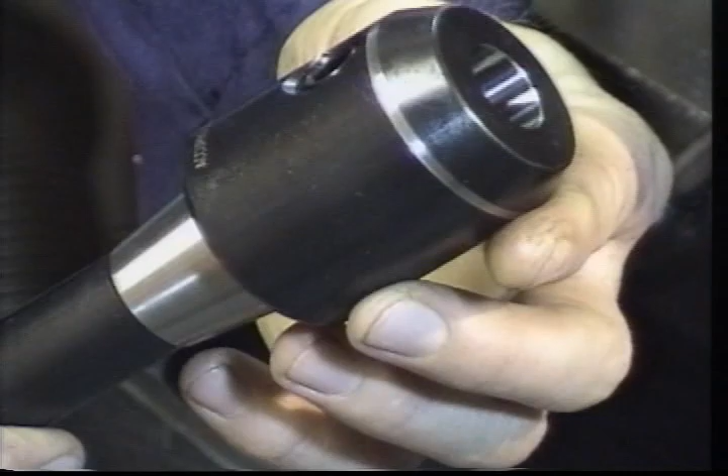Some folks get a little excited and feel that the end mill has the possibility or potential of slipping in a collet, and they've come up with an interesting concept as well called a tool holder. This is a very expensive tool holder made by the folks at AccuPro. Very rigid R8 collet design, machined integral with a heavy boss and a 3/4 inch precision hole that has been ground. It will accept our 3/4 inch end mill.

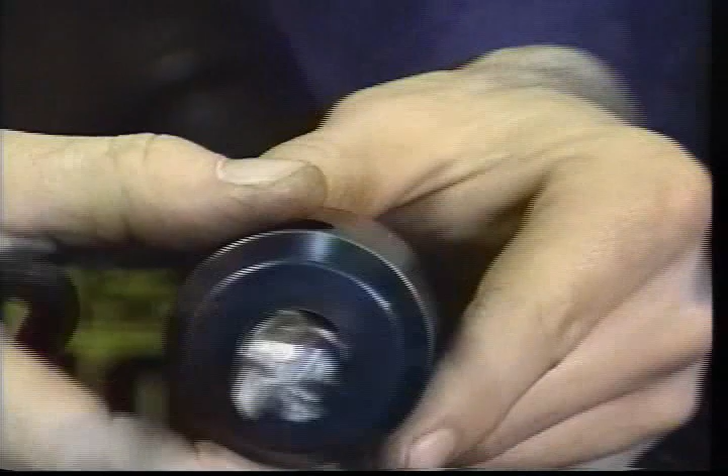You can see that we've got our flat on the top of it and our large set screw here. So in order to apply this correctly, we simply loosen the set screw, push our end mill into place, tighten our set screw down against the flat that we showed you earlier, and that locks our end mill rigidly in place. It's very important when we apply an end mill to the tool holder or the collet that we choke it up really close. We don't want a tremendous length protruding from the tool holder. This makes for a very unrigid setup.

In some applications it may be necessary to extend the cutter out farther because we've got a deep hole to machine into or we've got a boss that is interrupting that. For that type of machine work, you cannot use this type of tool holder because it is regulated by the flat that we see on the cutter. It's a big advantage of a collet system in my opinion, because with a collet it allows us to be able to infinitely adjust the length or depth of our tool.

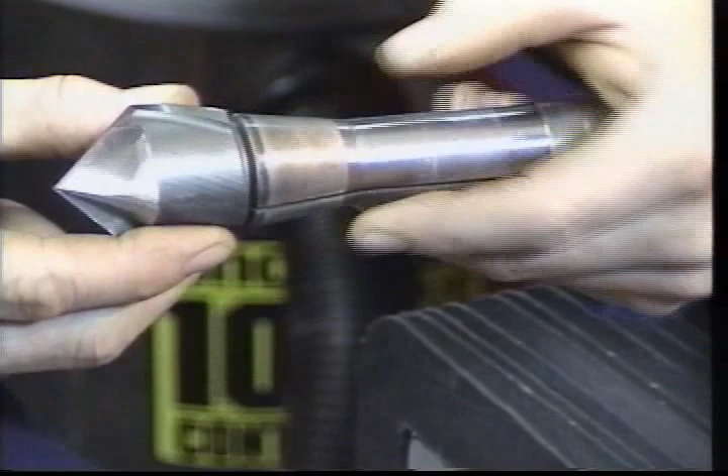Ideally, if we were going to use this V-block form cutter that we have here, we'd want to choke it up really close to the collet. Okay, you can see we've got it choked up right on the end there. But if we have a deep hole to reach or a hard to get place, we can infinitely pull this collet out within reason and expose more of the cutter. Remember, we're losing a little bit of rigidity, but we still need to get into the deep hole to cut, so some sacrifices are going to have to be made.

A good rule of thumb when trying to determine how much cutter we can expose from the collet is 1.5 times the diameter of the shank that we are using. Okay, and again, this is going to apply to the different types of materials that we are using, the depth and feed rate of the cut that we're doing. Anytime that we extend the cutter out from the collet or the tool holder, keep in mind we want to slow down our feed rate a little bit, take a minute amount of material off because we have lost a little bit of rigidity in the holding process. So that's a good versatile way to deal with a collet system.

Again, with the big ball end mill properly installed, we would want it butted up right against the end of the collet. In some cases we can extend it out, but not very far. When we're dealing with form tools, depending upon the tooling that we've designed, we always want to keep our form tool as rigid as possible. We've got a special form that's been ground into the cutter, allowing us a very precise profile in the milling operation. We've spent quite a bit of money to have this profile machined, so we don't want to damage or break the cutter. Keep that in mind as well in your machining.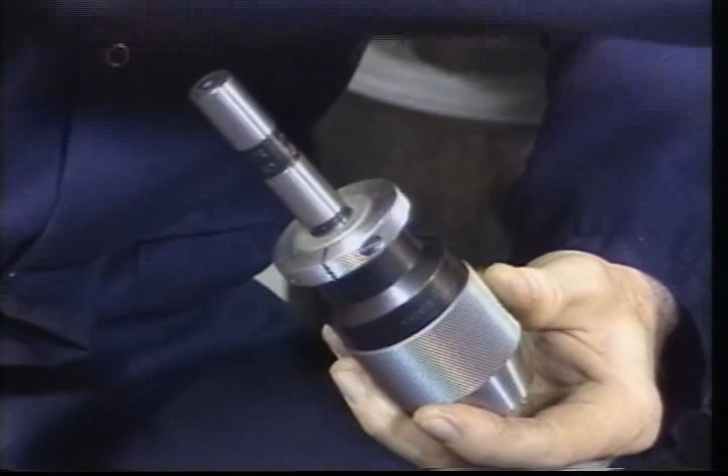Another useful tool that we'll be using in the mill is a drill chuck. This particular chuck is made by the folks at Albrecht. It's called an Albrecht keyless chuck. For those of you that purchased our instructional course on the lathe, you'll see that we used an Albrecht keyless chuck in the tailstock. It's got a big knurled band, and with a twisting action of the wrist, we can tighten the jaws around our drill or end mill. We'll show you some neat tips and tricks on using an end mill in the drill chuck in special applications.

It's not really rigid enough by comparison to a tool holder or a collet, but in some applications it can be quite useful when we want to machine or recess or counterbore a pocket at the same time we're using a center drill. So having good chucks, spend the money on them. Don't buy a cheap imported chuck. Get a good American-made or European chuck like an Albrecht or a Jacobs to complete your selection of accessories for the mill. All right, that pretty well covers the tool holders. Now let's take a look at some of the different types of cuts that these end mills and profile cutters will produce.

We've shown you a variety of cutters that you may expect to find in a machine shop. Now let's take a look at what those cutters are capable of and the different profiles that they machine. We've installed a fly cutter and we've got a block of aluminum mounted in the vise. We'll show you how quickly and efficiently a fly cutter surfaces a piece of material.

Okay, we'll back our fly cutter out until we just are in contact with the work, cast off of it. We're going to take about a 5/1000th pass. Anytime that you're working with aluminum, a really cost-effective lubricant for machining aluminum is old WD-40. With a very smooth advance of the cutter, we'll start surfacing across our part.

All right, we'll install one of our AccuPro tool holders, and let's take a look at what a form tool does on the end of our aluminum slab. Make sure we don't have any aluminum chips or debris on our tool holder as we insert it into the spindle. All right, let's take a look at what a form cutter does now.

Just like a giant router bit, for those of you that may be woodworkers, our form tool is going to start profiling now our block of aluminum to our finished dimension. We'll give it a little shot of WD-40 there and improve our surface finish. The nice thing about machining aluminum is you can really get a nice surface finish on it.

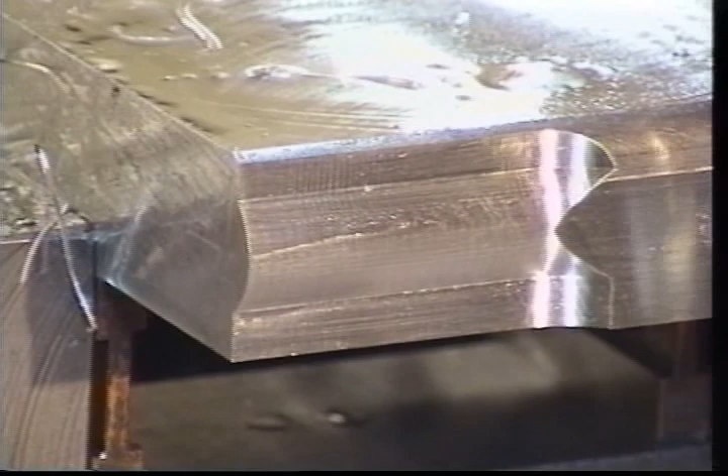For a final pass in aluminum, I recommend a climb cut. We'll go into that a little bit farther into the series. But you can see the special profile that we've machined now. This particular form tool is for building a special wrench that we do. Let's move our cutter out of the way and see if we can give you just a little bit better view. There you go. How's that look on a close-up? It's a nice concave profile there, like I say, for a special wrench that we do.

All right, let's change cutters now and go to a Woodruff cutter. Remember, the Woodruff cutter now has got considerably more teeth than this two-flute cutter, so what are we going to need to do? You guessed it, slow the cutter speed down tremendously. We're going to go ahead and shift the machine into back gear. We'll use a 1/2 inch collet. We're going to turn the Woodruff cutter about 135 RPM in back gear.

We're going to put a Woodruff key in something, a shaft or another part. Remember, we index the top in. We go from out to in on our exchange lever, and we turn it in reverse in the back gear mode. Give it a little shot of WD-40. Lower our cutter to our workpiece just a little bit. Let's take a look at the effects of a Woodruff cutter.

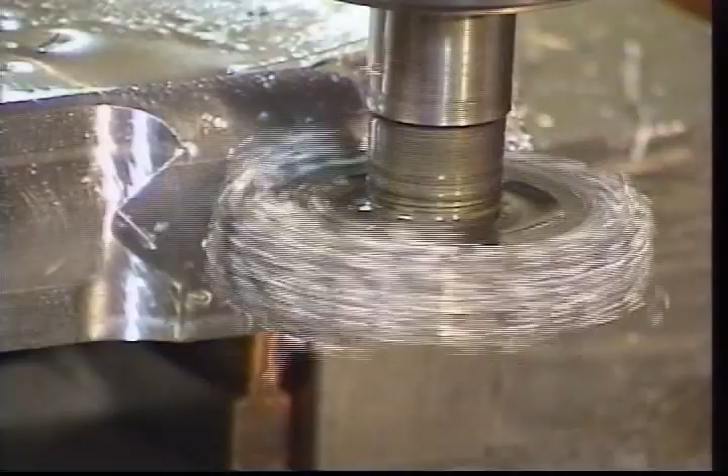Okay, now these types of cutters have a tendency to load up. So take them out and clean them from time to time. Give them another shot of lube. You can use your air hose on them. Blow those chips out.

All right, let's take a look at what we've done. I'll grab the air hose and I'll show you the proper way to use air on a milling machine. You can have a pressure regulator on the hose line or very gently use our air hose to blow the chips away. Turn your machine off. All right, you can see the beginning of a keyway that we're just starting to machine into the end of the aluminum block using a Woodruff cutter. Now let's go on to bigger and better cutters.

Let's go ahead and make a little V-block pass. But first, what are the important things that we must remember when we shift from back gear to direct drive? We make the change on top of the headstock. We switch our lever from in to out, and then we take our wrench and turn it until we hear that clunking sound of the gears dropping into mesh again. Otherwise, if we turn it on, we're going to have a terrible crashing gear noise before those gears align themselves.

All right, let's use a center cutting 3/8 end mill this time. Remember we talked earlier about a center cutting mill or a mill that we can plunge with versus a non-center cutting mill. This is a 4-flute center cutting in the AccuPro tool holder.

Remember we talked earlier about listening to the machine. Hear how smooth the machine is running. It's not going clunkety clunkety clunk. That's telling us we're turning at about the right RPM. We've got a feed rate that is consistent with the RPM that we're turning. Anytime the cutter is going clunk, clunk, clunk, trying to grab or push the work out of the way, it's telling us usually that one, the feed rate is too fast or the RPM is too slow. We'll take a third pass again, about another 100 thousandths, and then we're ready to try our big dovetail cutter.

All right, we've made the last pass using a 3/8 end mill. We can see we've got a lot of chip buildup around our part. Do we want to use our finger to go ahead and wipe those chips off? No way. Grab an acid brush, a toothbrush, use a little bit of air, whatever, but do not, under any circumstances, stick your finger in around the cutter while it's moving.

We've developed a pretty sharp edge along the edge of the channel that we've machined there. If you're to run your finger across it, it's going to cut you like a serrated knife. So always use a little acid brush or a rag or towel when you're wiping it off, and be very gentle. All right, now let's throw in our special V-block cutter and see what that profile looks like.

V-block cutter has a 3/4 inch shank on it. So what size collet are we going to install? You guessed it, a 3/4 inch collet. Choke the cutter up nice and tight to the top of the collet. Bring it down in contact with our work.

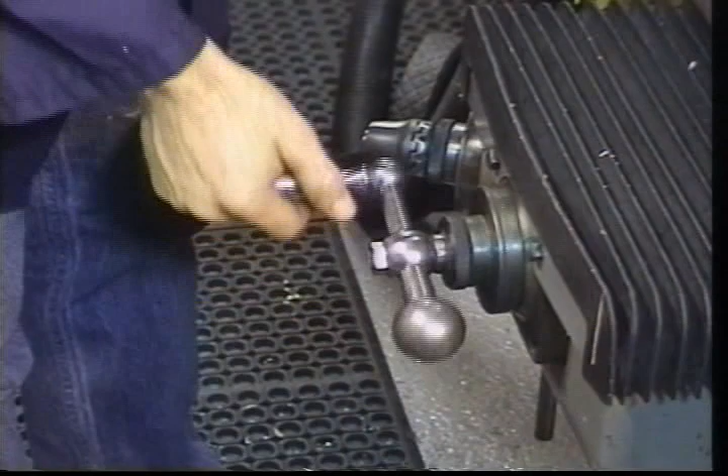Okay, we can index our cutter over now for final pass. We'll go ahead and climb cut in this direction. Clean up both sides. We'll clean it off and show you what a radiused ball end mill profile looks like. Remember, we've got a nice uniform rotation of the hand wheel on the y-axis. Just let it slip through the palm of our hand.

Get some of the chips out of the way so you can see a little better, and another shot of WD-40, and we're just about complete. I'll try and give you a close-up view there so you can see that nice slot. All right. That's a pretty good example of the types of profiles and different machining operations that we can do from basic cutters, form cutters, and fly cutters.

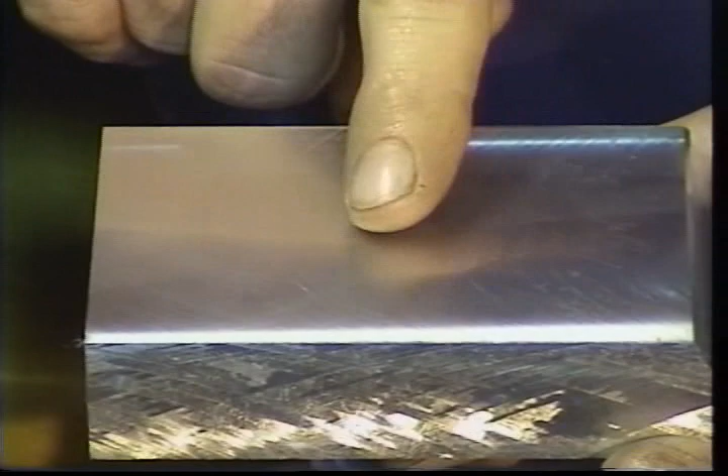The top surface we machined with our fly cutter. You can see in the beginning as I moved my finger across, we had a nice, smooth, uniform rotation of the hand wheel on the bed. When we went to the choppy mode, you can see the big score mark that was left as we rotated the handle down. This is what happens if you're not careful and have a smooth stroke. So keep that hand wheel rotating like a greased ball bearing in the palm of your hand.

Next, we have a slot that we machined with the ball end mill. You can see it's a nice deep radius channel. We've got our form cutter profile that we machined on the end. It's a good view of that. We've also got our keyway that we machined with the, you guessed it, Woodruff cutter. Woodruff cutters are used to machine slots and keyways. We've got a nice radius edge that we did with the corner rounding end mill.

All right, we've shown you a lot of the different cutting operations using specific profile cutters, Woodruff cutters, end mills, ball mills. Now it's time to move on and take a look at the different types of materials that you may be expected to machine in the shop.